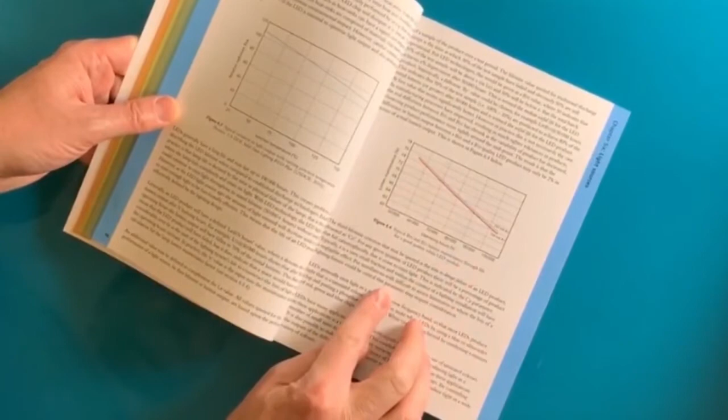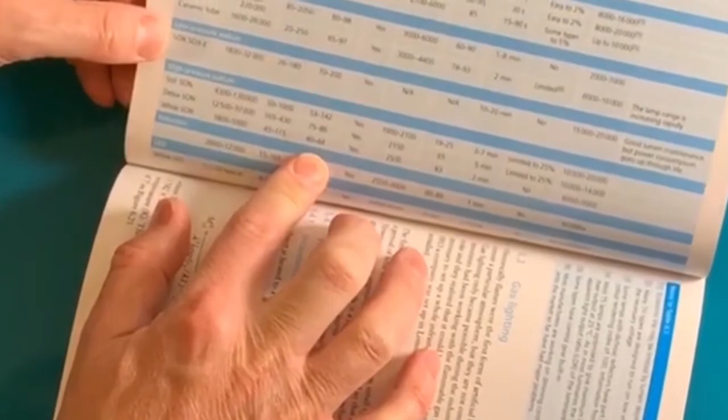This time, the handbook has been completely rewritten and expanded, giving you even more information on lighting design, technology, and the application of light in a wide variety of situations, both interior and exterior. There are 34 chapters, that's 13 brand new chapters. There are some new appendices too, and it's about 50% bigger than the old version.

We've taken out some of the fundamentals, put those back in the Code for Lighting where we think they belong, and that's left us more room for information we think will lead you through your day-to-day design and application needs. The handbook should in fact guide you through initial design decisions, through the selection of appropriate technical solutions, and then give you information around application, installation, commissioning, testing, verification, and indeed maintenance.

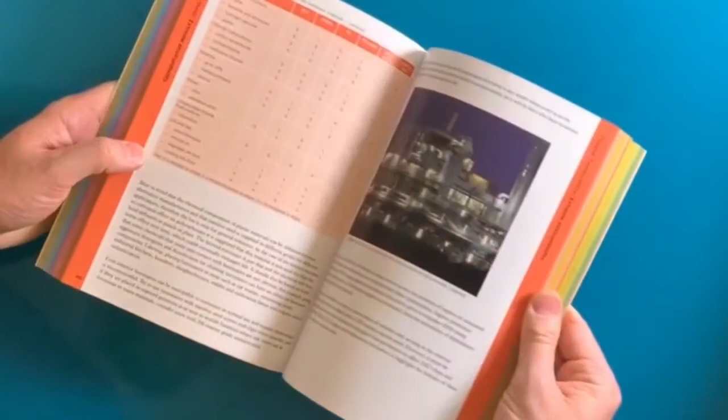I particularly like the handbook because it starts with people and their activities. It takes that experience and it adds things like well-being on top. You'll find some stuff on circadian lighting in there. You'll find some design issues, functionality, ambience, identity, accessibility, safety, security, all the stuff you'd expect.

It also allows you to look at design constraints around professional conduct and the design process, and indeed how you would work with other people in that design process. There's plenty of guidance, plenty of legislation, links out to standards, design approaches. You'll find practically everything in here, and a lot of stuff about LED, power over Ethernet, lighting controls.

In terms of the applications, there are now more chapters on communal building areas, places of worship, communal residential, places of entertainment, courts and custodial, transportation, exterior. This list goes on, doesn't it? But there's so much information in there, you can find practically everything you need. Where do you get hold of it?

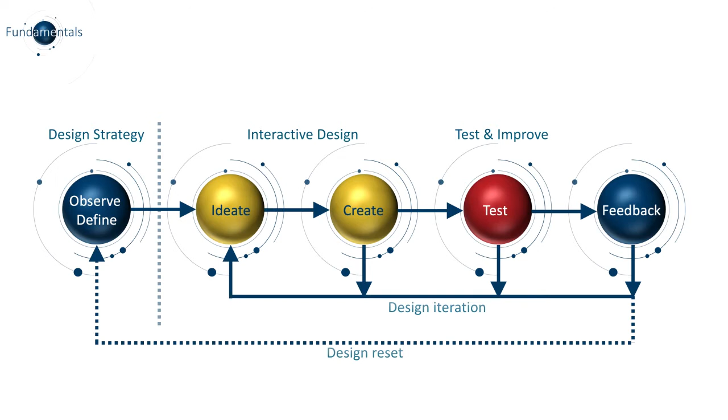So then we start looking at things like daylighting. The daylighting chapter looks at 5 subjects effectively. So we start looking at things like the benefits of daylight. There's huge benefits from daylight. Let's be clear about that. As a lighting manufacturer, of course, we look at artificial lighting, but essentially the more that we can harvest and utilize daylight, the more we should in any of our designs.

But we need to control that daylight. It's great having daylight, but how we utilize it is critical. So we start looking at things like the benefits of daylight, what benefits that has in terms of positivity on our health and well-being. And as I said, if we start looking at things like the control of daylight, we do have problems with glare from daylight. We need to ensure we utilize control in that case, but also things like overheating.

If the building is virtually glazed, then you may struggle with overheating from daylight. So things like this need to be taken into account as well. And clearly, privacy and security. We need shades not only to protect us from the glare from daylight coming in, but we also would look to use them from a privacy point of view as well. So things like shading and different types of solar and anti-glare glazing-based technology, all of these are available to us. And all of these need to be taken into account.

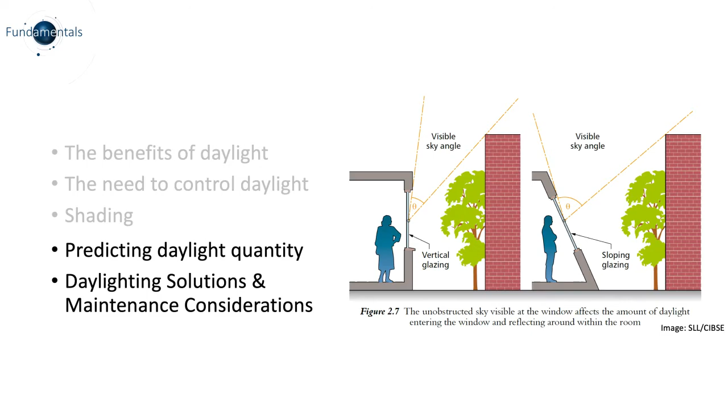So then the guide starts looking at things like emergency lighting. Emergency lighting is obviously very, very critical when you're looking at a lighting design from conceptual stage or refurb or anything like this. And the SLL guide teaches us the legislations and standards, the design approaches, what equipment we need, the planning, and indeed the installation, test, the maintenance.

But I wouldn't be doing my job properly if I didn't say, before you look at any emergency lighting, any emergency design, you have to follow a full risk assessment. So the risk assessment will have been written up by somebody, a person of responsibility within the business, etc. And that risk assessment has to be adhered to whenever you're looking at design.

But it's widely accepted that emergency lighting is there as a source when we have a power outage. It's not there for fires and things like this. So the SLL guide teaches us a little bit about that as well. There's CPDs specifically on emergency lighting as well. So please, feel free to ask on those later on as well, because there are specific CPDs just on emergency lighting.

But the handbook reminds us there's a legal requirement to provide sufficient lighting to lead us to a place of safety. So essentially, within your building, if you're new to the building or if you've got a visitor within the building, then you must be able to guide that person out by means of secondary emergency light.

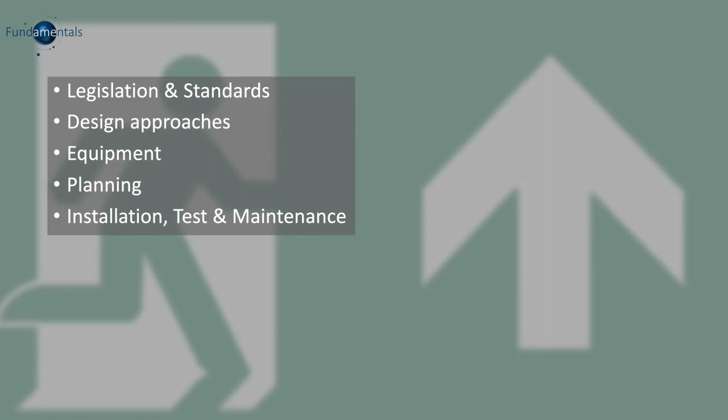BS 5266 is the place to go for high risk task areas, but equally the SLL guide points you in the right direction. You'll also find things on BS EN 60598, i.e. the manufacturing of luminaires, and that is contained within the SLL guide as well.

So then if we start looking at things like the design ethos, how we look to put a design together, what's the professional conduct for a designer effectively, and there's things called code of conduct. We look at simple things like professional standards on bribery, something perhaps we don't necessarily think impact our design choices, etc. But we need to consider these, and the SLL guide does point us in the right direction there as well. It also starts looking at professional standards and tendering, how we put a tendering document together, and it also starts looking at equal and approved status and sustainability.

COP26 was just a couple of weeks ago. Sustainability is in all of our mind's eye, and indeed the SLL guide does point us in that direction. But within design ethos as well as some of these other areas, your life of a product, how long a product should last, and things like TM66 now start pointing us towards the longevity of a product, how long we can actually use the outer construct of the product and change the inner workings within the product as well. But it also gives us some inspiration on design, as well as looking at our safety of design as well.

The Chartered Institute of Building found in 2013, when they did a survey, that 49% of the respondents believed corruption was common within the UK construction industry. That's a really high number. So in 2013, they carried out this survey, and they realised that 49% of respondents believed there was corruption. That's something we can't have, and so professional standards and bribery are all covered within the handbook.

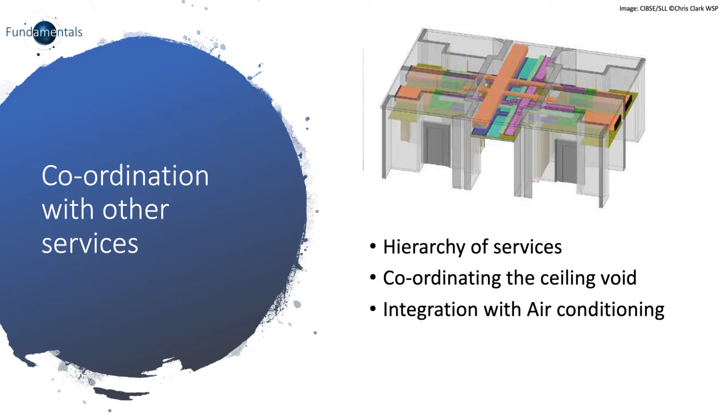Just on temperatures, if we're using LED as a light source, then it likes colder temperatures. It's not best placed in areas over 25 degrees. And indeed, when you look at photometry on lighting manufacturers' luminaires, you'll see that it'll have an ambient temperature of 25 degrees built into the data. So heat does have a really significant effect, both positively in colder temperatures and negatively in warmer temperatures. So understanding coordination of services is a critical factor, really.

So that's part one of the guide now put in the can, so to speak. So we now start looking at part two, and here we start looking at things like light sources. We look at control gear, luminaires and luminaire types, power to lighting systems, and indeed controls. All of these are covered in part two. And critically, there's conventional light sources as well as new solid state lighting. So the SLL guide hasn't forgotten about the conventional light sources. All of that is captured within part two.

It also covers the control gear required to drive the light sources, and it discusses creation of things like scene setting. So if you're looking at, for example, illuminating a restaurant and you want 4 different scene sets, be that cozy light of 5 or 10 lux during the meal, or if you're looking to bring patrons into the building, then you may have higher light levels. So we can start talking about scene setting.

It also broadly discusses the luminaires that house the light sources. So it gives us a guide on where the light is required. So we start looking now at things like polar curves and photometry in the next few sections. And again, the power systems required to energize the lighting in the first place. And then again, the controls. The controls aspect now is becoming very key, whether that's just a simple presence control or a more technologically advanced wireless control with daylight dimming and daylight harvesting, etc. All of this is covered within part two of the guide.

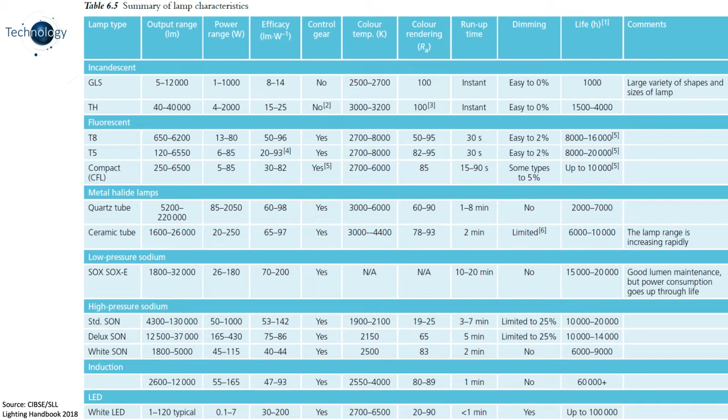So if you look at column 4 there, we can clearly see that some LEDs are poor performers. And this should be a reminder for us to look at and specify the right light source, not just automatically go to a particular light source. If you're only interested in LED, and as I said, as an industry, I guess around about 98% of what we produce is LED now.

But again, I mentioned a little bit earlier when I talked about things like temperature sensitivity. LEDs are sensitive to temperature. We can't lose sight of that. It also starts talking to us now in these next couple of graphs about lifetime and what effect temperature has on things like the lifetime of a product as well.

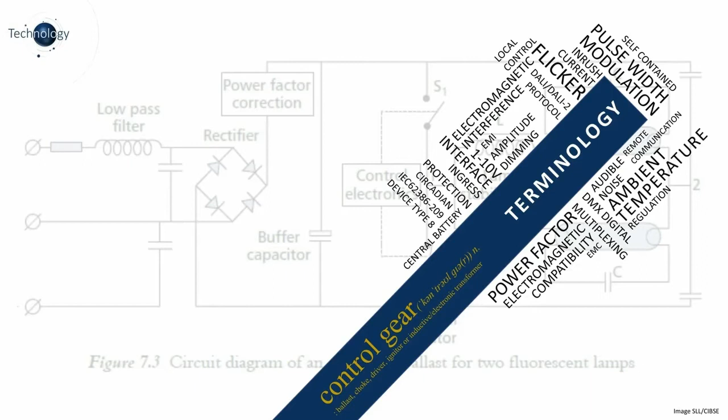We touched upon it a little bit earlier. We're touching on it again here, circadian, but like I said, Iain later on will talk to you in more detail about circadian in terms of the SLL guide. There's very little in the guide, it's fair to say. There's a small section in there, and again, we'll give you some more details on that later on.

Then we start looking at the classifications. So we look at things like CE markings or BS EN 60598, they both mean the same thing really. BS EN 60598 is part of the requirements for CE marking anyway. And then we start looking at things like ENEC, so the European norms electrical certification. So any certification that you're looking for when you're specifying products, the SLL guide will give you an insight as to what they all mean.

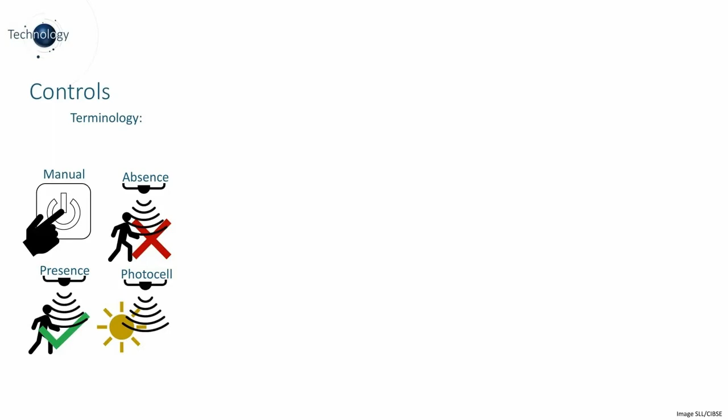Then we start looking at the application. So again, we start looking here at the available illuminance from daylight. So we talked about daylight a little bit earlier, and as you can see, the numbers are flicking through here now as well. So how much daylight am I getting will affect how much artificial light I need. And again, this can all be done via controls. So we have what's called a constant illuminance.

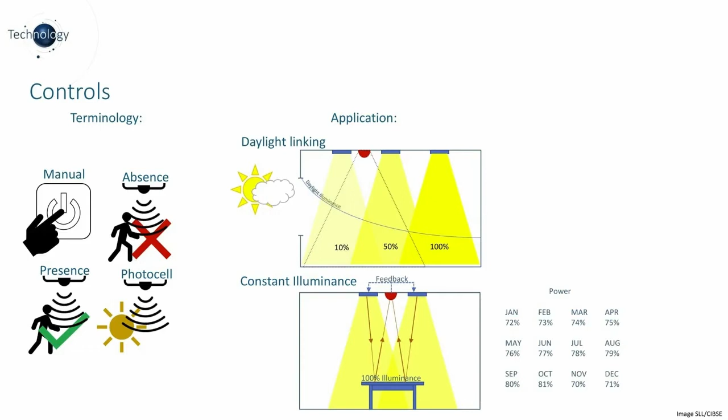So it may be that you're getting 50% in through the window, and then you need the horizontal desk to be illuminated to say 500 lux. So you're getting 250 through the window from 50%. You may need 250 then artificial illumination to get you up to your 100%. And this is basically what we know and what we refer to as daylight dimming and constant illuminance, etc. These are the terminologies that we start touching on here.

And then we talk about dimming as well, whether that's a mains dimming, a standard mains tungsten type dimming, or whether that's a 1-10V dimming, a DALI dimming. These are all the terminologies that are built up, and Bluetooth as well. And you'll see in the SLL guide, there's what's called SLL guide 14 as well, which is the control of electric lighting. So there's actually a whole section of controls, etc., within LG 14. And again, I urge you to have a look at that.

So again, we start looking at things like circadian, again within the technology section, Appendix 2. And this is basically the introduction of increasing color temperature, increasing light output, etc., throughout the day. So during our cycle as cavemen, effectively, we woke up to sunlight and we went to bed as the sun set. So the dawn and dusk mentality.

Well, clearly, with artificial lighting, we can stay in the same building for 24 hours if we so wish. Well, this is starting to look at how we adopt outside light sources in an internal fashion, be that the ramping up, like I said, of correlated color temperatures, or sometimes the ramping up of light levels as well.

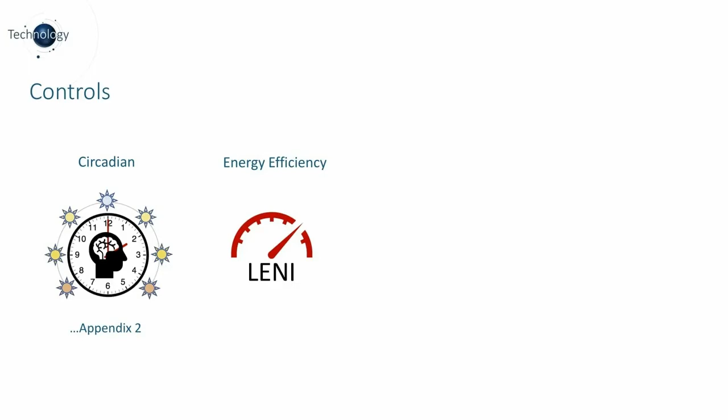Then there's a section in there about LENI, the LENI calc. This is the lighting energy numeric indicator. It touches on how we cost our lighting, our energy sources, etc. on lighting. Starts talking about the building regulations, and energy reduction is basically what LENI is all about. That's the fundamentals of it.

And then the section closes off with automatic testing and monitoring for things like emergency lighting. How you're going to monitor that system, how you're going to commission it, is also crucial. Hence the last part being commissioning and handover. If you look at things like the RIBA stages, etc., you'll see commissioning and handover are critical parts of any building, and lighting is no less important.

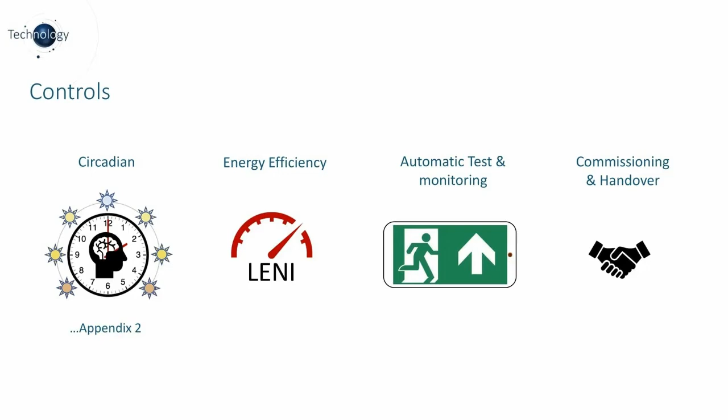Commissioning and handover is really where you start getting the best out of the design that you put forward in the first place. Now, time is critical here, so I'm obviously not going to go through all of these sections, but parts 1 and 2 account for about 150 pages, so about 30% of the book. The next 270 pages are purely based on applications. So this is looking at things like the brand new section on communal residential areas, but it also touches on lighting in offices, education, industrial, etc.

But there's some new sections here, as you can see, in things like communal residential, places of education, places of entertainment, courts and custodial. All of these are new sections to the book, but it doesn't stop there. There are more, hence the 270 pages. So we have things like exterior workplaces, and exterior architectural is new as well. How we start lighting the exterior in an architectural manner, etc., are all brand new sections. And again, I'm time sensitive, so I'm going to push on.

So if we start to look at things like offices now, the chapter immediately challenges us to stop thinking about a typical office and start thinking about some new fresh designs. So, this is the stereotypical office, i.e. you might have remembered it with a Cat 2 louver, a shiny parabolic reflector, etc. It starts telling us to stop looking at it in stereotypical fashion, stop looking at it necessarily on 2.4, 1.8 centers, and start looking at other ways of lighting offices, particularly now with the way we're going to engage with offices in the next 5 to 10 years. The working from home mentality, or the hybrid working fashion.

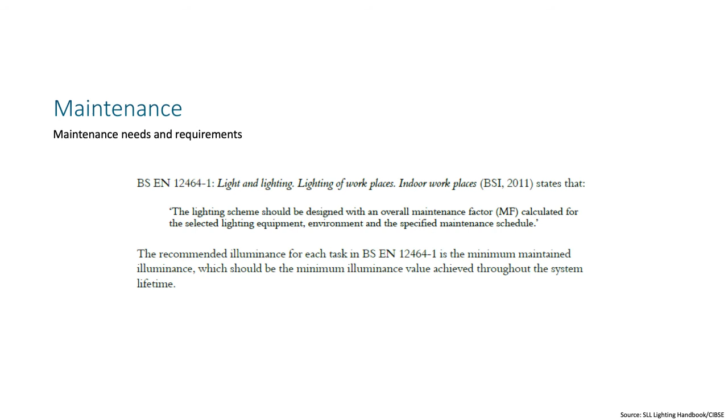And it's crucial that you understand the maintenance factor, because if you're just using software programs, it'll automatically default to a position, whether that's 0.8 or 0.6 or whatever. So it's crucial you know how to build your own maintenance factor, just to double check. And the next few slides is how we do that. So we start then, maintenance factors, the needs and requirements. So again, what's the impact on the scheme from things like depreciation? What's the impact from things like dirt and degradation, etc.?

Not guessing, not simply saying 0.8, is again crucial, because it'll impact the longevity of your scheme effectively. Low maintenance factors do have an impact. It's very important that we say that. So the lower the maintenance factor, of course, the increased quantity at the start of the project you're going to need.

But equally, if you see a scheme where it says 1 as a maintenance factor, and sadly you do see them from time to time in the industry, I question your designer or I question your manufacturer to make sure they've taken the appropriate steps, because all luminaires will have outside degradation, be that dirt or dust, etc., as well as the lifetime expectancy of the product. So seeing 1 as a maintenance factor may be a red flag to you. You might want to start looking at that design in a little bit more detail.

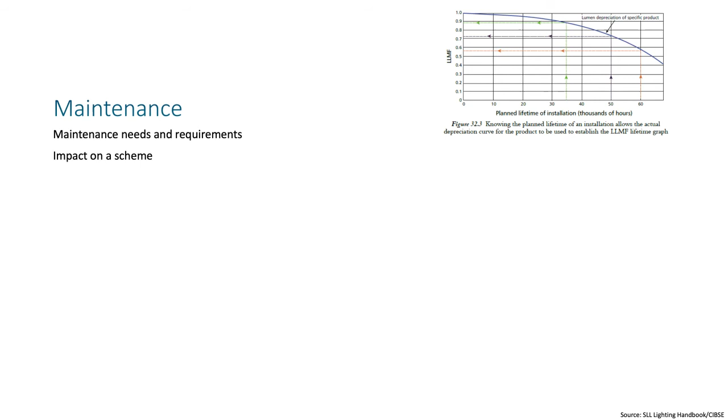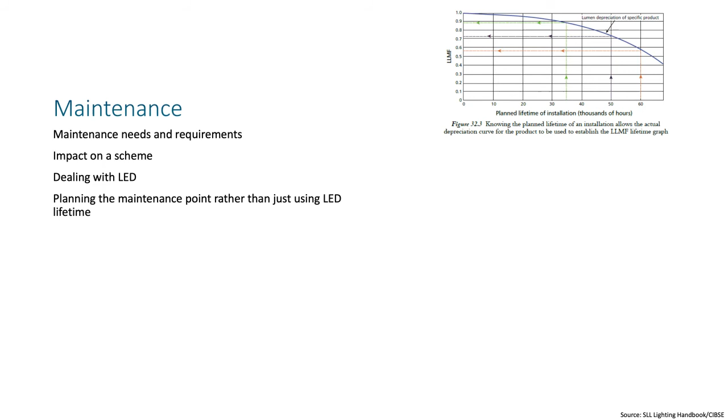So plan for a maintenance point rather than just using an LED lifetime is another crucial factor. When do I want the life of this product to end? Start looking at things like that. But the handbook deals with things like lamp lumen maintenance factor. It starts looking at luminaire maintenance factor, as well as things like room surface maintenance factor. Again, things like luminaire and room surface maintenance factors haven't changed, so they need to be calculated. They need to be installed within the calculation.

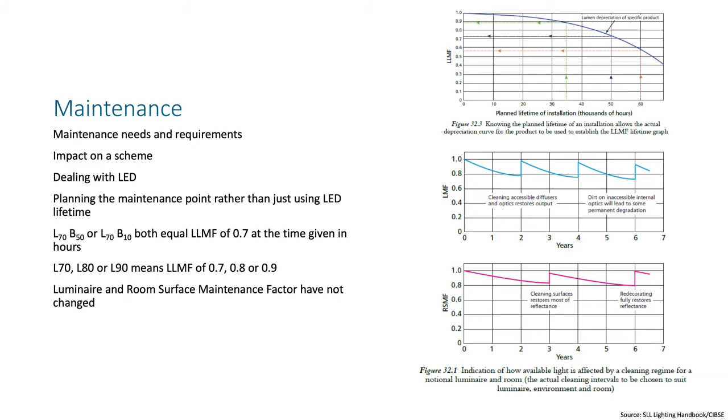So again, you can see some of the graphs now on the right hand side. These are talking about cleaning surfaces. Is a building clean? Is it normal? Is it dirty, etc.? How often is it going to be cleaned? All of these things will have a major impact on the maintenance factor to begin with.

So the final thing then is lamp survival factor. Depends on spot or group replacement. If we talk about an old light source, every time a lamp goes out, you can immediately change that lamp, or are you going to wait for 10 of them to go before you change the lamps? All of these things have an impact on the maintenance factor.

And lastly, you'll see the maintenance factor is built up of all of those 4 criteria, the aforementioned 4 criteria. So all of those 4 numbers will give you a maintenance factor at the end. And I'm conscious of time, but I urge you to do that calculation. I'm pretty sure it won't come out at 1 anyway.

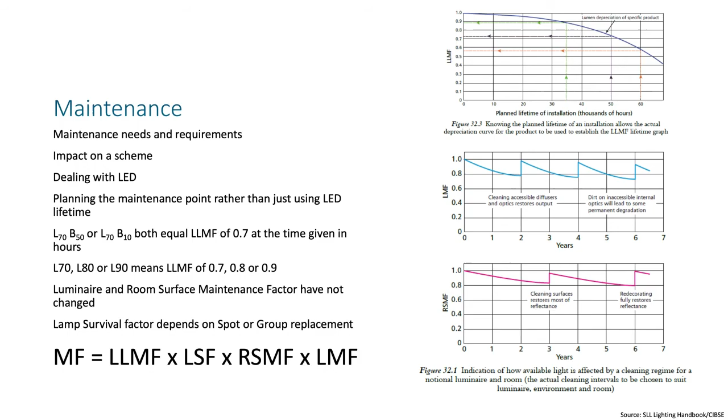So again, starting to finish off the presentation now, the fundamentals and applications are now over, but we start looking at things like appendices. So reflectance and colour, circadian, there's that word again, circadian lighting, and indeed building regulations, environmental labelling of schemes. And your host again, Mr. Macrae, will take over in a short while and talk to you in a little bit more depth about colour. So if we start looking at the first appendix, which is colour and reflectance, here is where I hand over to Iain, because he says it a lot better than I do.

So the chapter on reflectance and colour really deals with the quality of light you're putting onto a surface and that surface's reflectance properties. So you put great quality light on, the colour will be brought out truly. If you miss out some colour spectrum, then of course the surface can't reflect that light and you can't see that colour. Now, it should pique your interest around LED, because in the marketplace there's this theory that all LEDs really struggle to bring out the reds, and that's not really true.

So if you look at figure A1.8 in the handbook, what you find is this wonderful table by Gerard Harbers, and this shows a good quality RA80 good colour rendering LED versus an excellent colour rendering LED, and indeed some other light sources too. And look at that top line. What really matters is the R9 value. R9 is missed by the general colour rendering index. It's only picked up by the extended index, and that's not the index that most manufacturers publish.

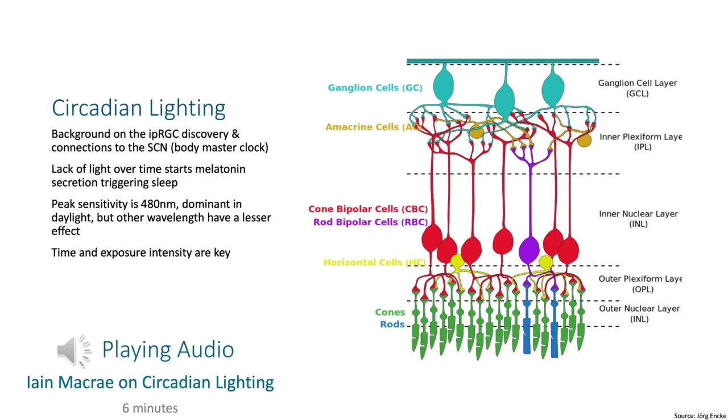Recently, we've found that actually the ipRGCs respond to different wavelengths of light, not necessarily to the same intensity as blue light. There is a lesser effect, but it's still an effect. And time and exposure are key. So the handbook goes on to explain how research developed a little bit, ending with some research by Lucas et al. in 2014, which developed this alpha-opic illuminant sensitivity curve.

And this is the idea that actually you look at all the secretions done in the brain in response to light, and you see that the response curve varies right from 380 nanometers right up to nearly 700 nanometers. So there is a response to all colors of the spectrum. And that leads us to the conclusion that simply changing the color temperature isn't a good indicator of what the spectrum is, and that isn't a good indicator of what the circadian effect is.

But this research was used to develop some insights into, if you know the spectrum of a light source, you can work out what its circadian impact will be, what its melanopic impact will be, and indeed you can extrapolate that out to melanopic illuminance if you want, the equivalent effect of daylight. What it doesn't really tell you is about the intensity, and we still have to look at how we use spaces with the right amount of light for the right amount of time and the right spectrum of light to see what its circadian impact really is.

The problem we've got at the moment is most of the case studies lack comparative data. They're not double-blind tests or regimes. They use subjective questionnaires, and they don't really go back at a later date and monitor the impact on secretion levels and so on. So it can be used. It's a really interesting bit of research, but we've got a little bit of a way to go yet.